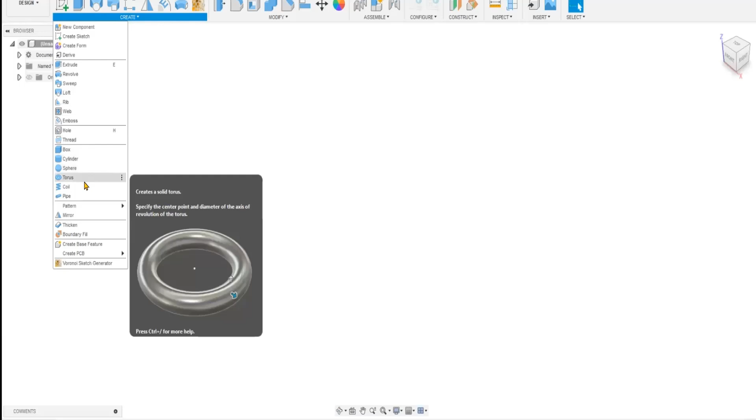What I'm going to look at now is box, cylinder, sphere, torus, coil and pipe. It may seem a lot, but they're very quick ways of doing these things without worrying about a sketch.

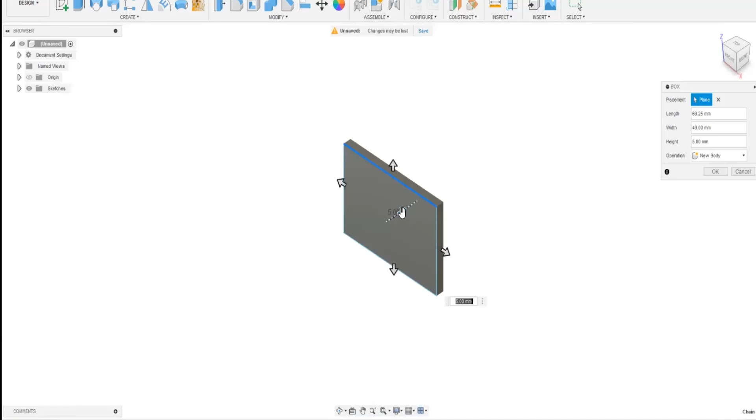So a box is basically there - pick the plane you're going to go on, and I'll do this in 3D. Just click down and drag, and when you click there, you get the options to alter its sizes. You've got the length, width and height you can type in, and the fact it's a new body, join, or cut. We've done all these commands before, so there's no need to go through them again. And there's our box finished.

You can go down here and edit the feature, so you can go back in and edit it or alter the sizes. It's a straightforward, quick way of getting a box on the screen, rather than going into full sketch mode.

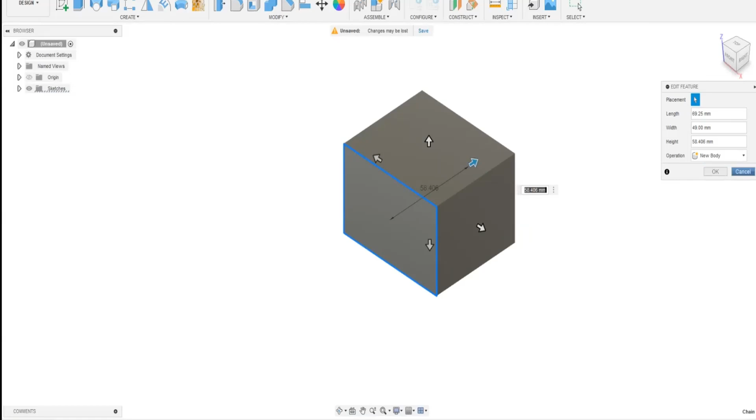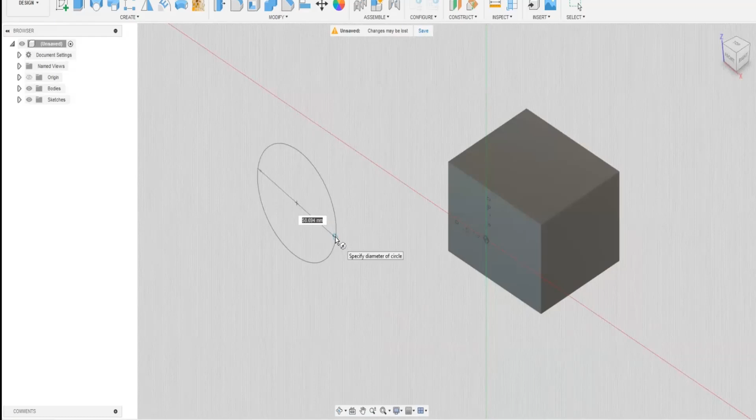We'll leave that one there and move to one side. The cylinder is very much the same, only easier. Again, center point, drag out your circle. When you get your circle to what you want, either type in the measurement and hit return or click the mouse button, and your option then turns to extrude it.

With this one, you can only extrude one way - you can't extrude either side of it. Measure out your size, and again you've got new body, cut, intersect, etc. Click OK, and there's your cylinder. Again, you can go back and edit the feature.

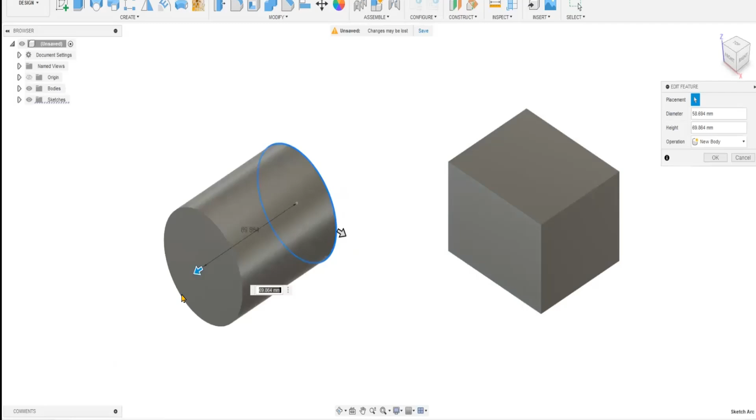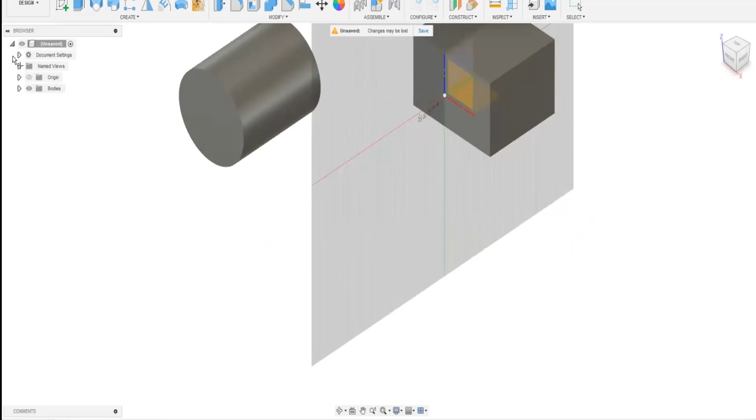Next up will be the sphere. Very useful, because the only other way you can draw a sphere successfully is to sketch half a circle and use the revolve tool. But with this one, you can go in, pick your plane, click a point on the plane you want, and then your sphere is there.

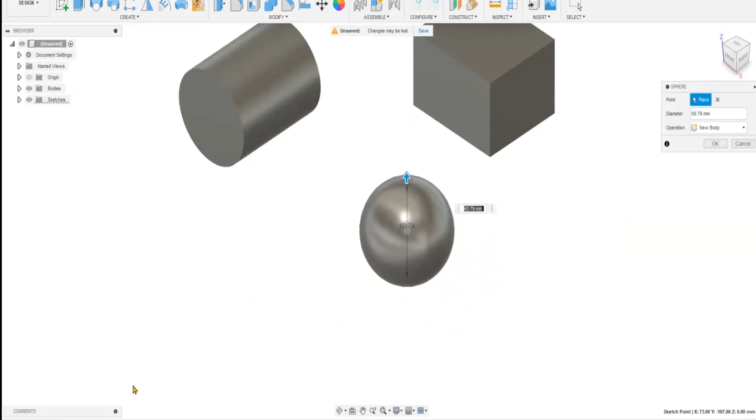It comes up, and you just alter it to what you want - again, new body, cut, whatever, diameter. You can go back to edit it when you've done it. There's no sketch, but you can go in and edit the feature.

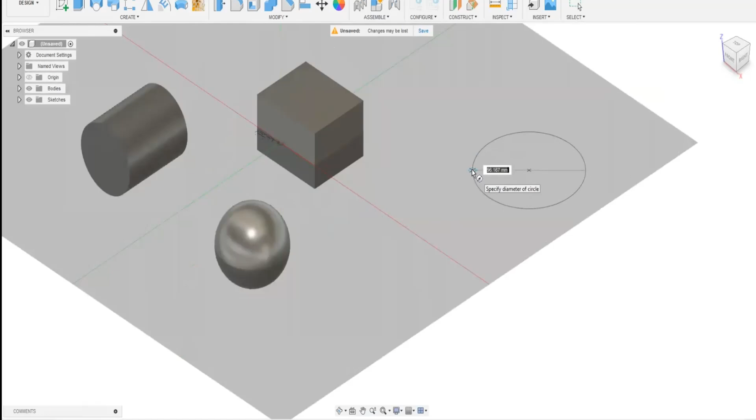That's the sphere. Then we go on to the torus, or the toroid, whatever you want to call it. Again, let's go on a plane - center point, pull it out, center point again, and then you've got that one for the inner diameter and that one for the torus diameter. You can type them in here: inner diameter, torus diameter, and on the center line.

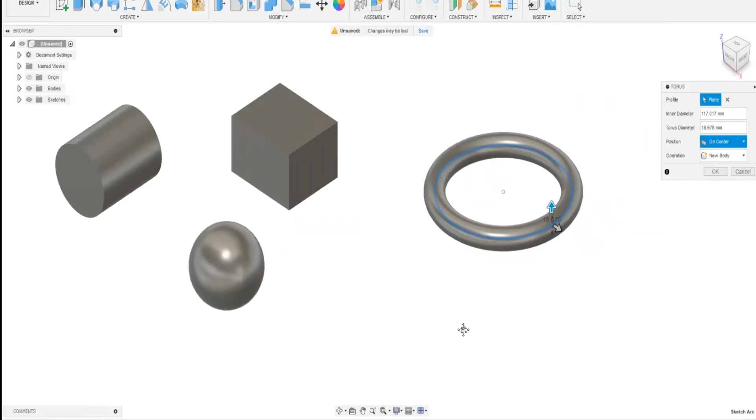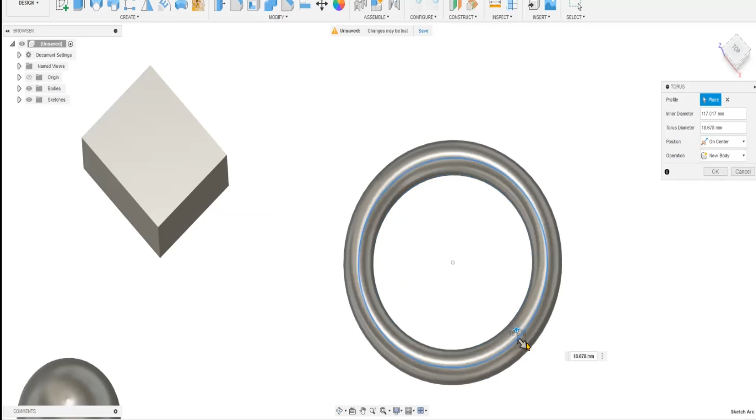If we look at this a bit more closely - you can see the torus is about the center line. If I do it on the inside, it all gets done on the inside of the line, or the outside of the line from the center line. That one thickens it, and that one makes it bigger.

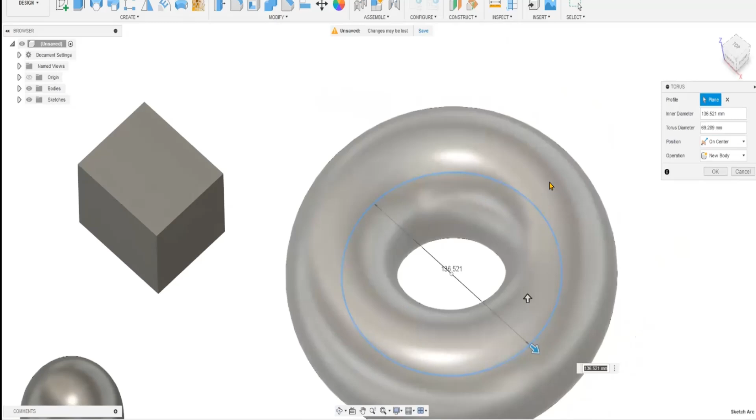That's the torus. The only other way you would do that, I suppose, is to create a circular sketch, then do a circle, and then use the line-on-path thing we were talking about earlier.

Next one in this short list is the coil. Interesting one - again, we click on there, and we come out for the diameter of the coil, and then we have the height of the coil.

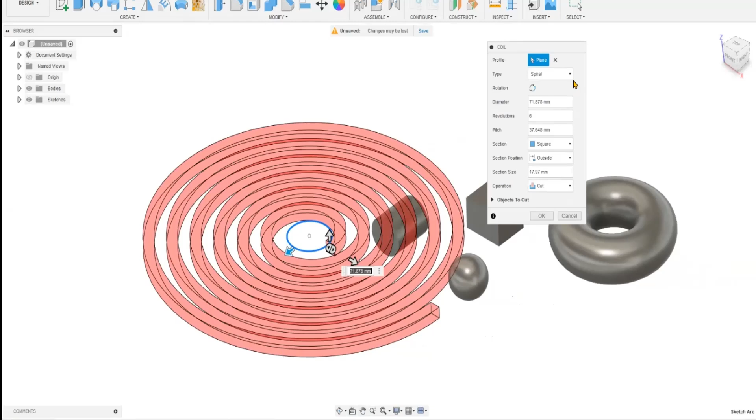Ready-made coil. Let's run through these a moment so we know what they are: the revolution and height, or revolution and pitch, or height and pitch, or spiral. The spiral basically goes from a coil to a flat spring, a bit like the flat springs in a clock mechanism. We'll go back to normal.

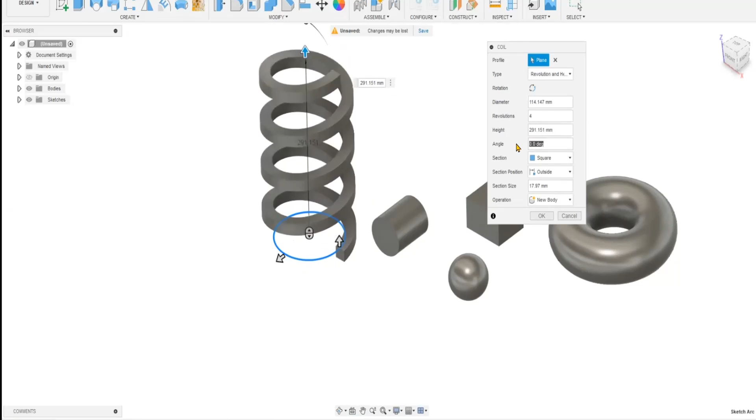As you change these different settings, you get slightly different results down here. So we'll stay on that one. The diameter is set there, which you can also change there, along with the number of revolutions you want. Let's say we only want 4 revolutions. The height, again, you can type it in or change it there. The angle—let's put 30 in—and there you can see.

If you were doing some sort of shape like this, the sort of thing that springs to mind is those springs you see on battery connectors in portable equipment, where you've got that pyramid type shape.

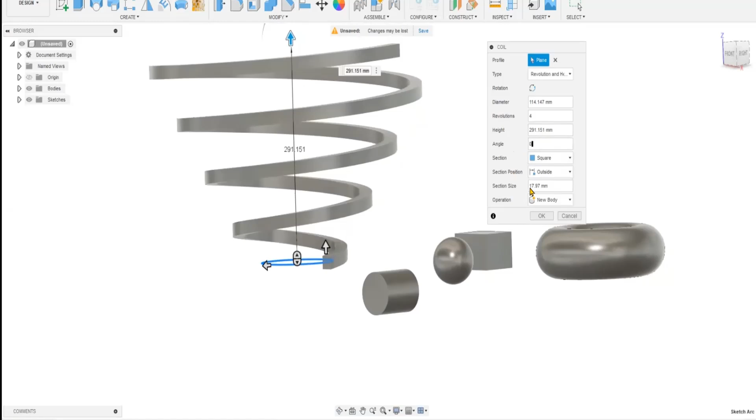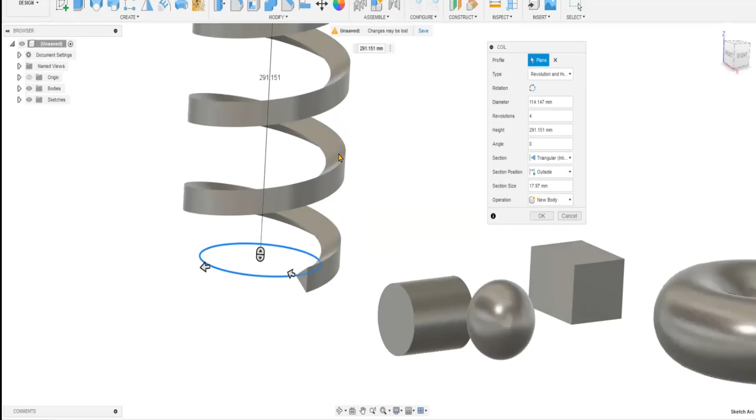You can also change the format of it from square to circular, and you've also got two triangulars: the external triangle, where it's flat inside going to a triangle on the outside, or the internal one, which is flat on the outside going into a triangle. We'll go back to the circle for the moment.

Section position—again this is the same as the toroid. At the moment we are on the outside of the curve. We can go on the center line of the curve, or we can go on the inside of the curve.

Section size is the size of the section, so let's change that to 10, and you can see it's a much smaller spring. But they say section, not diameter, because of course if it's a square one it would be a section, and you can change this.

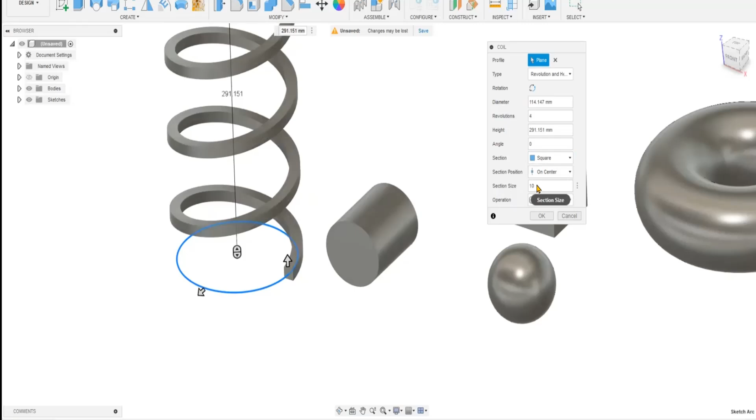Ideally if you've got heavy bogies, I suppose. And again, new body, cut, intersect, etc. That's the spiral spring one—very quick, very easy. Otherwise you'd spend ages drawing a path and putting a template along a path, and it takes forever.

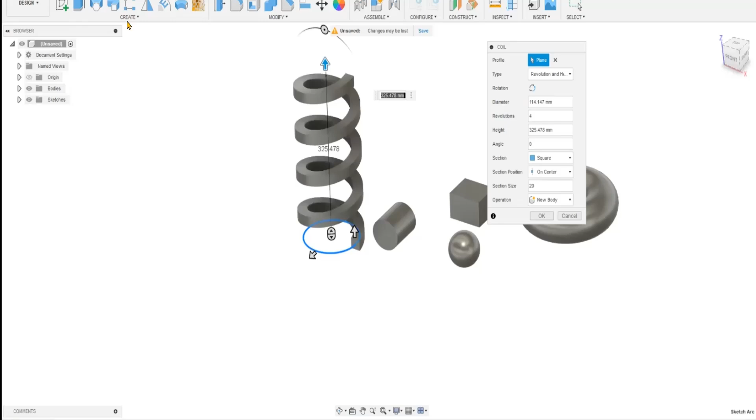Finally in this group is the pipe command. Now if you remember early on, I showed you a pipe command where we took a template along a path. This one's a bit easier—pipe. So we have to select a path.

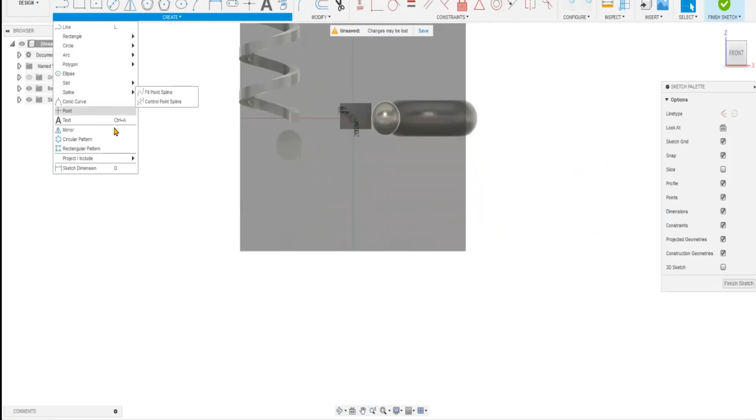So let's go back into sketch mode a moment and quickly put a path in. We'll do that one. So there's our path in, finish our sketch, and instead of putting templates on and fitting the template along the path, we can go down here, click the pipe command, and there's our pipe.

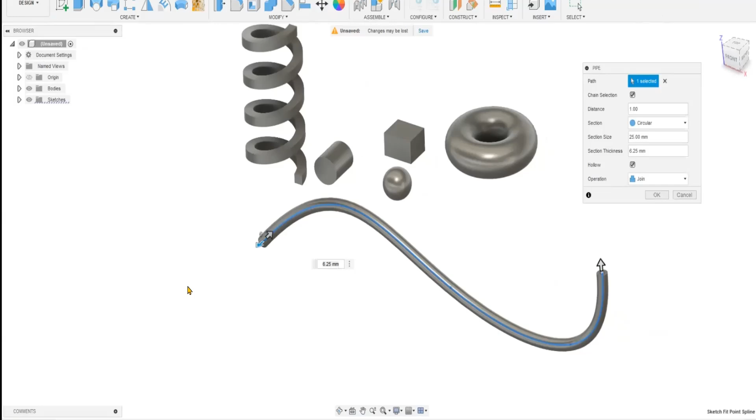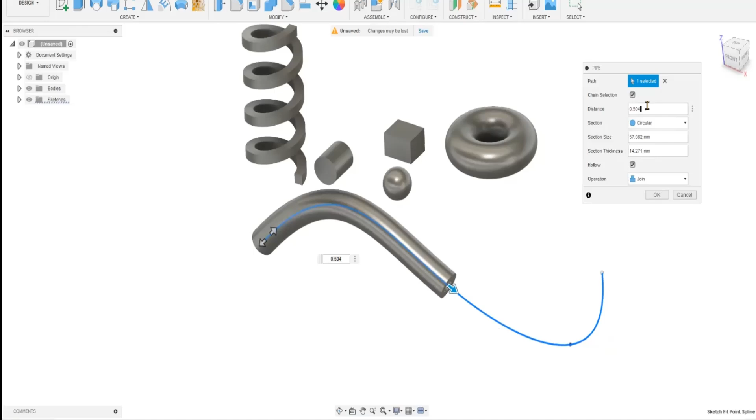And now on the pipe here we can decide on the distance. We've got the diameter down here—circular pipe, square pipe, or triangular pipe. Let's go back to circular. You've got the distance, which is the distance along the path it runs. And as Malcolm mentioned earlier, these distances, if you're not familiar with them, are proportional along the path.

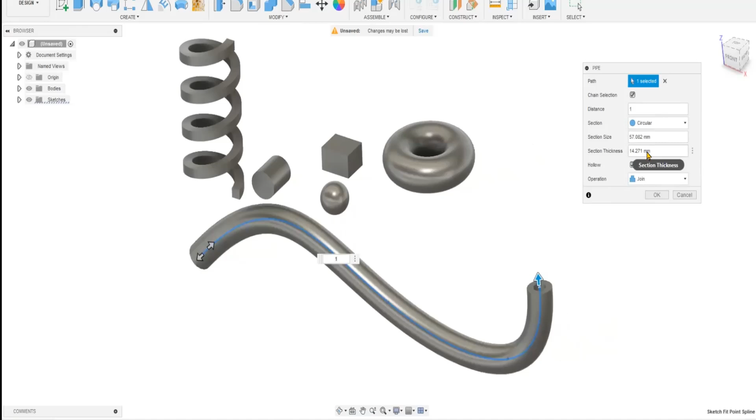So 0.5 would be halfway along the path, 1 would be all the way—they're not millimeters. We have a section size, which like the spring is a diameter, and it says section because it could equally be a square pipe. You've also got the section thickness, which is the thickness of the wall. Let's make that 2 millimeters, and you can see it goes quite thin. And again, hollow or not—we can make it solid or hollow.

Very useful command, because when I did it last time following a path, it would get complicated—you'd need a template for the outer and a template for the inner—whereas the pipe command is just so easy to use.